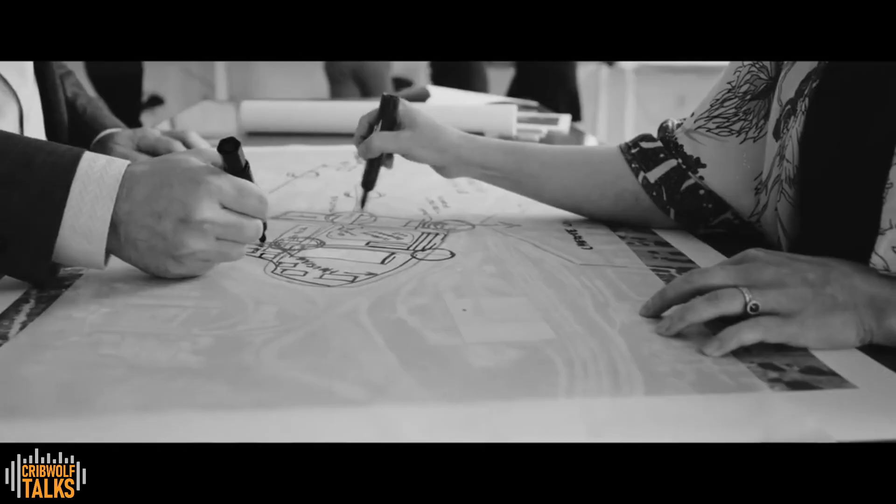Design to me is imagination. The role of an architect is being able to take ideas and concepts and translate them into a three-dimensional reality. In many ways, we're the quarterback of the football team and coordinating the different needs. How can we bring the best intelligence to a project and really make that into something exceptional for our client?

mcCallumSather relocated to the Westinghouse building, and we've often used our own premises as an incubator for ideas. One of the most exciting parts is the ability to bridge between the heritage and the future. Understanding what's there and letting it be what it is, and the new interventions are really creating a contrast that creates a counterpoint by bringing in that modern language.

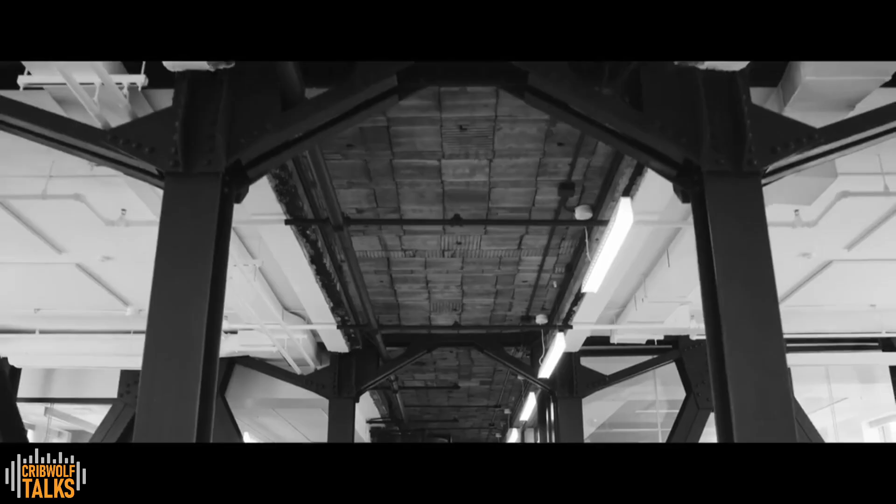Is it a challenge to approach a project with sustainability in mind? Not for us. I think because we have walked the talk for 20 plus years, it's how we think. The future of mcCallumSather is rich and exciting because of the youth and diversity that we have in our company. The fact that we have more than one discipline in-house is a big part of that. Understanding that we're better together and no one person has the ultimate authority to make good design happen.

The city of Hamilton's an exciting place to be because it's a mid-sized city, so the opportunity for impact is actually quite high. And that's what a designer is looking for. You see the reflection of your decisions on the streets. That's what Hamilton gives to any designer. There's never been a greater need for the skills and the intellectual content of what we represent as a firm, which is to the benefit of our clients and to the benefit of the environment. It's just really smart design.

So today my talk will be mainly focusing on how the combination of mass timber and sustainable design elements create opportunities to redefine possibilities for affordable housing, both in terms of building delivery and quality of living for its inhabitants. I imagine for most of you here, the benefit of my talk today will hopefully be getting down to the nuts and bolts of how things get built.

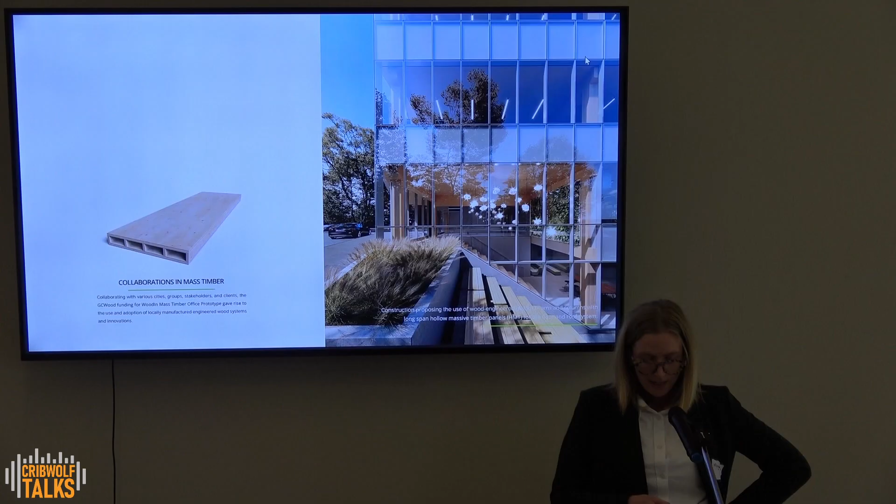So, situated in Waterloo, our community is known for tech startups and innovation. In 2017, our office responded to a government grant, Green Construction Through Wood. We won some grant money, and this research and development led to collaborations with various city stakeholders, clients, industry partners, all people who are really interested in how to get wood into the market. It really gave rise to the use and adoption of locally manufactured engineered wood systems.

You're tall. Sorry. There you go. Thank you. I even wore my tall boots today.

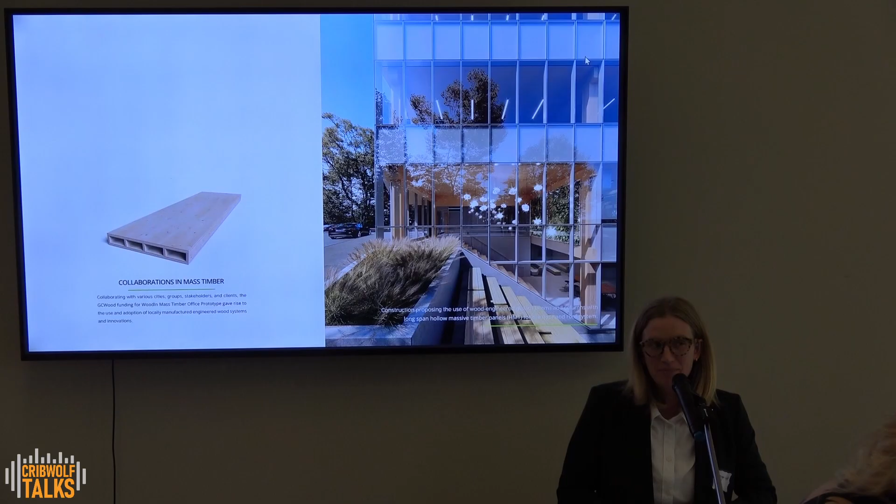So we work closely with our structural engineer and local manufacturer to really optimize architectural elements, to figure out how we could fit them in with the current building code, and then how we could implement them. So for those who don't know, when I refer to mass timber, I'm talking about the larger timber elements. Often it's nominal 2x4 lumber or something like that, and then it gets glued together in the factory. They can then CNC it, prefabricate it, so it gets delivered to site like building blocks, and it can go up incredibly quickly.

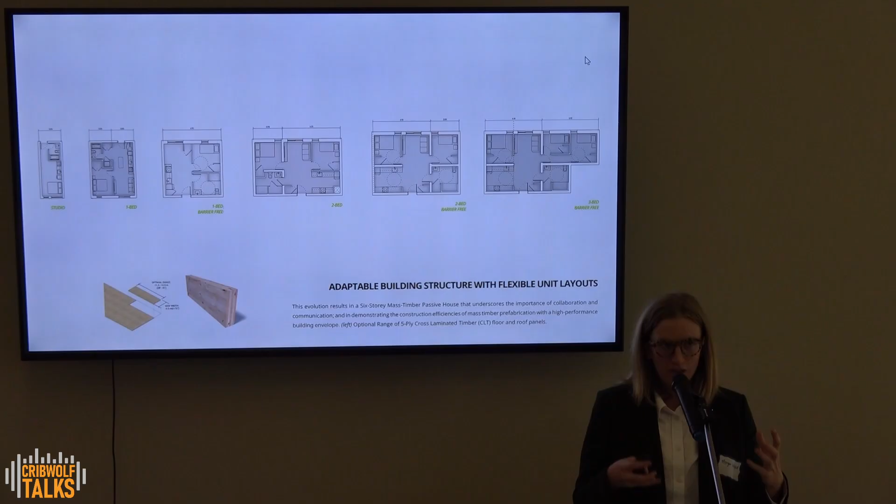So part and parcel to that R&D was finding opportunities to implement these designs. The optional range of CLT floor panels and adaptable floor panels are adaptable in building structure and creating flexible unit layouts. We developed this suite of how we could use those optional systems and create studio, one bedroom barrier free, two bed barrier free, and 3-bedroom barrier free units, so that when we're working with clients, we already have a set kit of parts that we know is going to be able to be deployed on site pretty rapidly. And then working with specific needs of groups, we can customize and cater to each project.

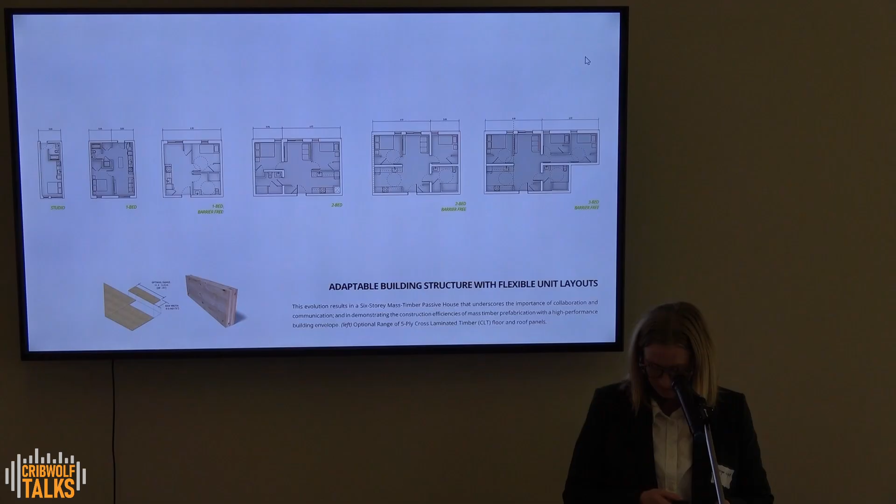So with rapid, affordable housing at the forefront, we have evolved our approach for this mass timber housing. We have tried to incrementally advance each prototype we've worked on, changing just one variable at a time with every iteration and evolving through each build. Leveraging recent success in mass timber projects through speed and scalability, Passive House has become our most recent lever to pull on.

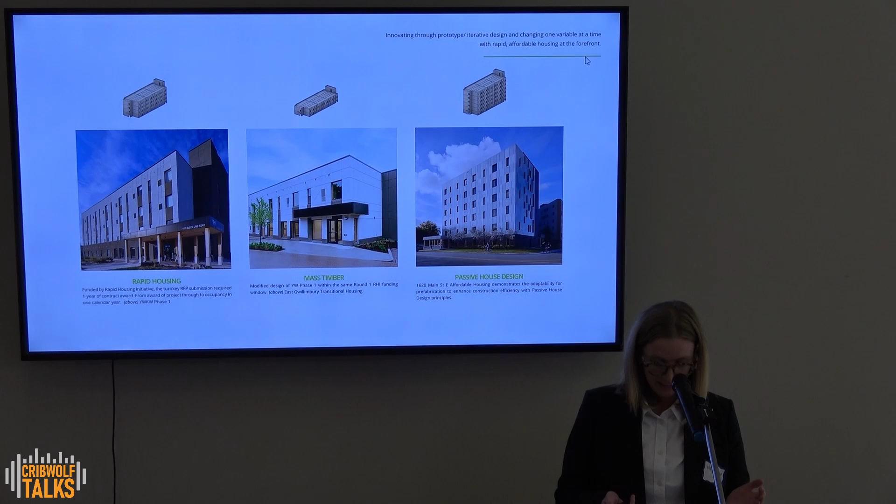So for those who don't know, Passive House is a very rigorous voluntary standard for energy efficiency, and it dramatically reduces your ecological footprint. It results in ultra-low energy buildings that require very little energy for space heating and cooling. And though Passive House is not required for affordable housing, we have found that CMHC does have very high sustainability standards for their funding right now.

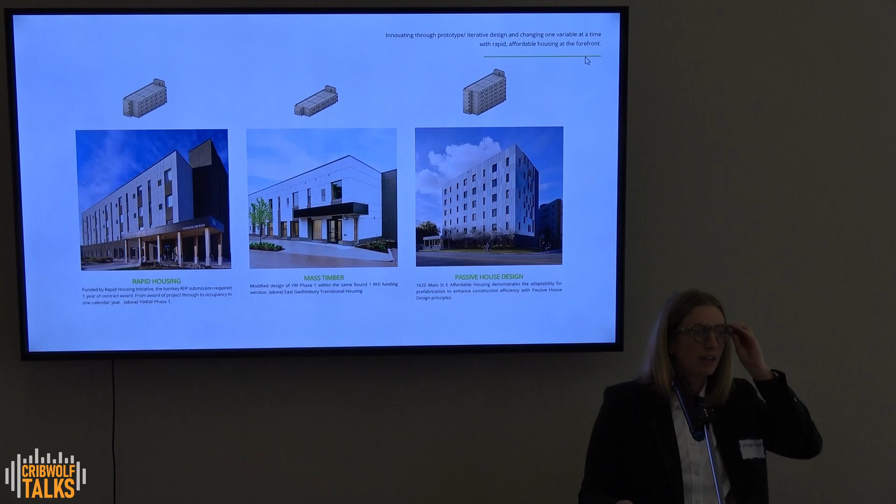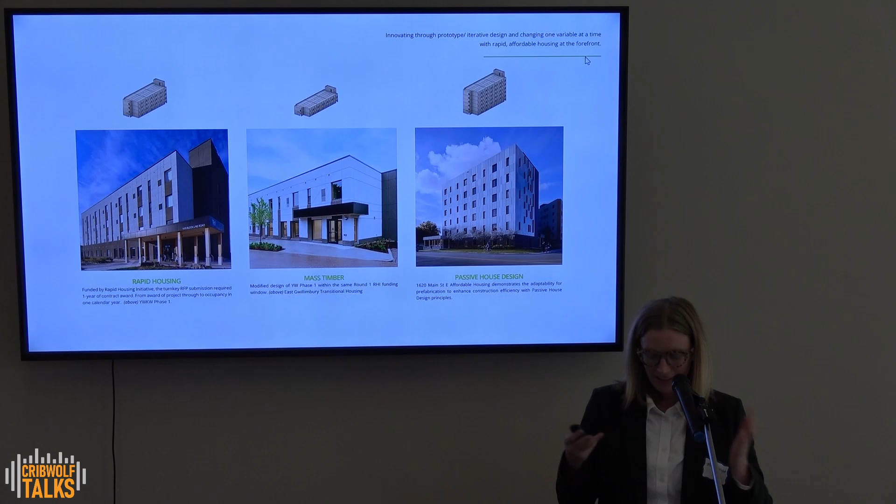So I hope that some of these ideas and principles can still be applicable to anyone starting these projects. I think it's between 25 to 55% better than the National Energy Code, depending on what stream of funding you do. So again, I think all these items are still applicable.

So just some diagrams here. We've again created this uniform grid that adapts to all those unit types I presented. The controlled environment of the offsite mass timber manufacturing minimizes on-site construction and really allows structures to be assembled incredibly quickly. This project here was the YW KW project in Kitchener, and the superstructure was assembled in 20 days, which was really awesome to watch.

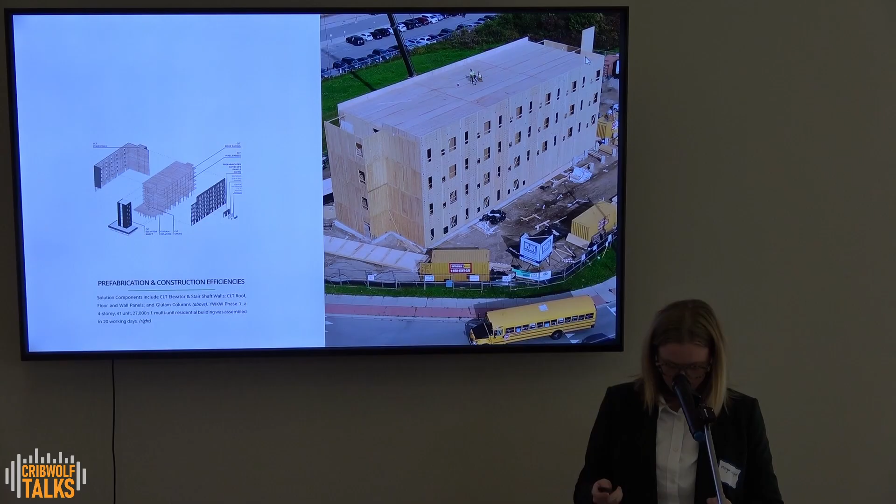There is a video online, so feel free to look it up. It was pretty incredible. Just some images here. I'll be talking a little bit about the project and the mass timber elements and the off-site manufacturing process.

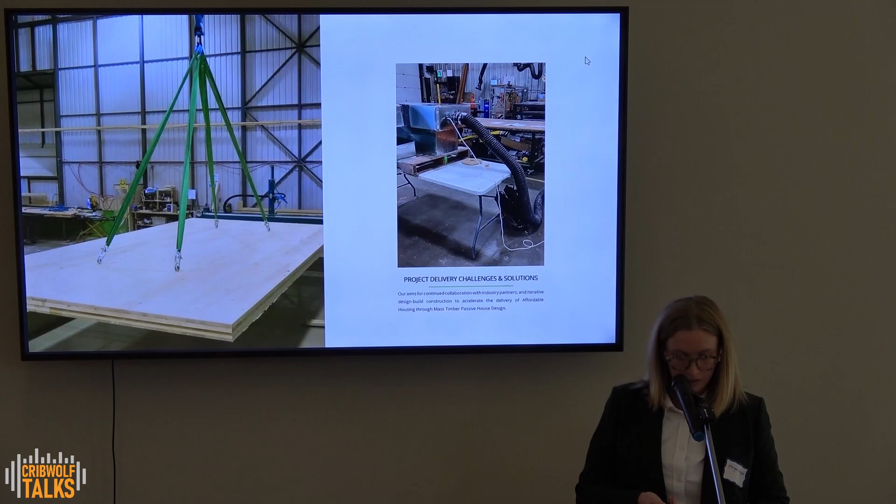So akin to the wood grant we received that I mentioned earlier, initial investment in innovative housing solutions has been funded through the CMHC, providing incentives and an appetite to build mass timber housing. So how did we get here? Early iterations were initiated through the rapid housing initiative funding that CMHC talked about earlier. Quite a few of the projects have gotten money through that stream, and as they mentioned, it's a direct path. It's CMHC giving funding to the municipalities, and then them directly giving it to the organizations that fit the specifications that CMHC outlined.

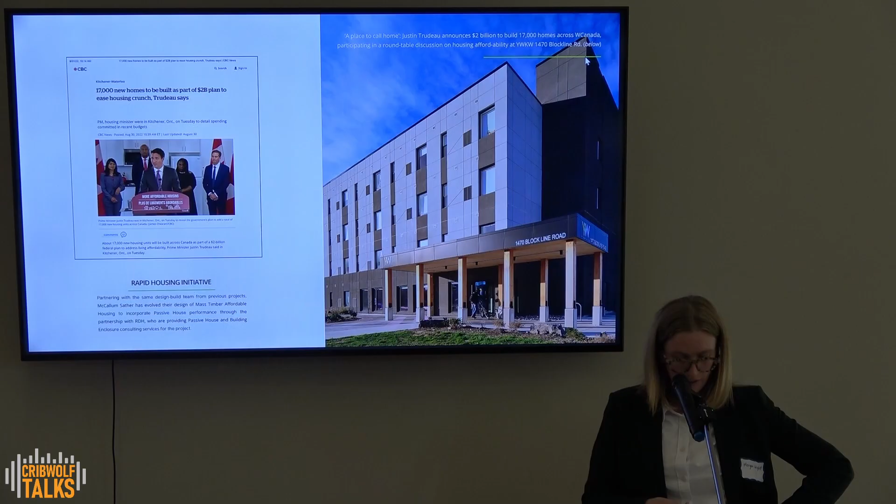So the second round was announced soon after one of our first projects was completed. You can see here this roundtable discussion took place in that YW KW project, which was very exciting for us. The federal government then announced the additional $2 billion to build, I think, 17,000 homes. So that really kickstarted one of our clients, City Housing Hamilton, to pursue innovations in mass timber for the first time. So a little bit about CHH, City Housing Hamilton.

Like many of you, their mission is to create accessible, safe, and inclusive housing solutions. As the largest social housing provider in Hamilton, CHH provides homes that are well-maintained and affordable. Part of their ethos is championing that Passive House design component. I'm not involved in the two projects shown in these images, but I just want to showcase that they have quite a big portfolio of Passive House projects.

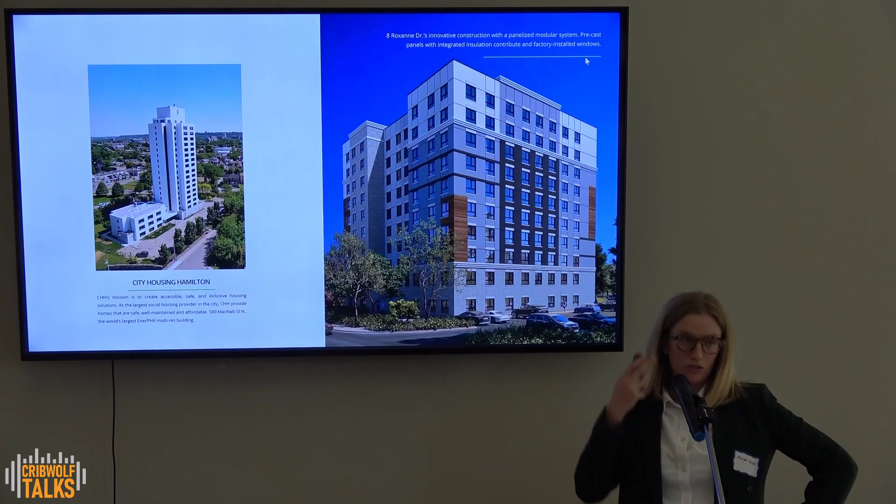The one on this side here was an energy-focused retrofit, an old building where they did a super deep sustainable retrofit. And on the other side is a prefab project that is also going to be Passive House certified. Their journey highlights the critical role of recurring partnerships, and we're thrilled to join partners with them and support their vision. So once built, the 1620 Main Street East project that I'm going to talk a lot about today is in the running to be the first mass timber Passive House multi-residential project in North America. So very exciting.

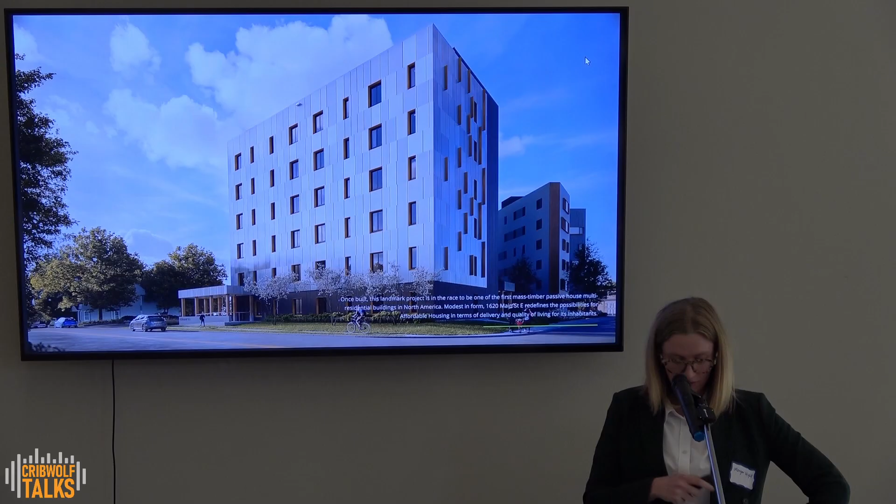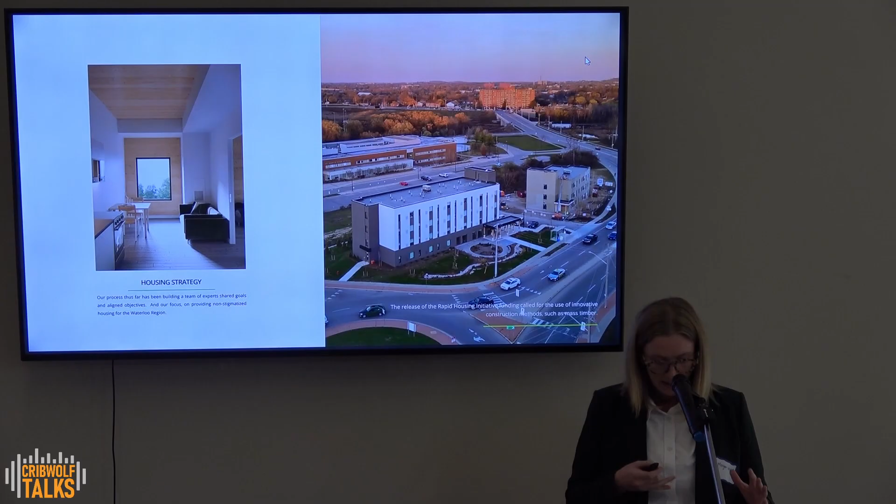So I'll kind of begin with the whole journey on this one. This initiative really began with a few key industry experts who really wanted to focus on destigmatizing housing and wanted to focus on mass timber, and believed that it could be an affordable and an interesting solution for this problem.

The RHI funding allowed us and our mass timber partner to build out this dream team to execute the vision. So we brought in Melloul-Blamey, who's a well-known contractor in the KW region and just generally Ontario, and they're really essential because they provide that backbone. They have a great reputation, they have the trade know-how, they have experience, and they were also really eager to try something new and provide good housing for our community. So they're there in the middle.

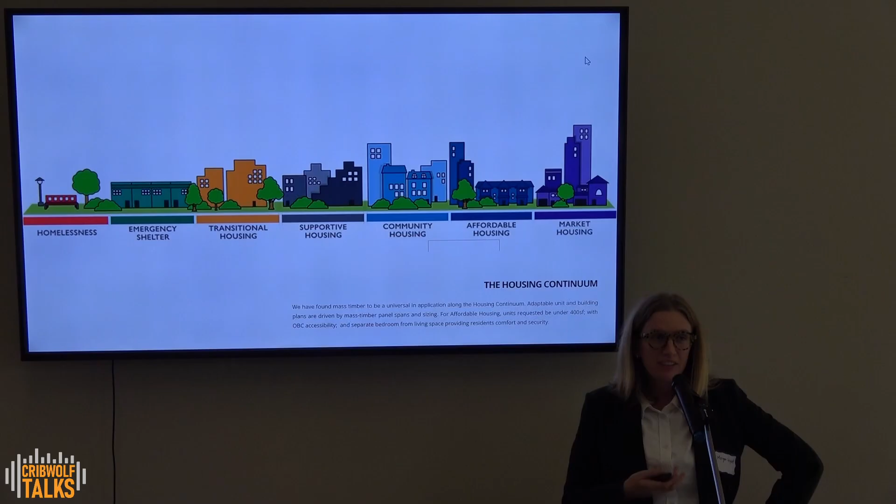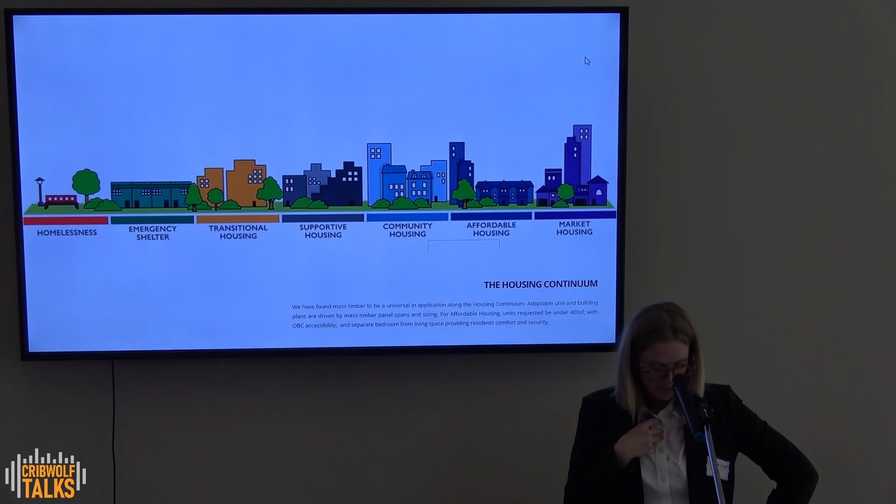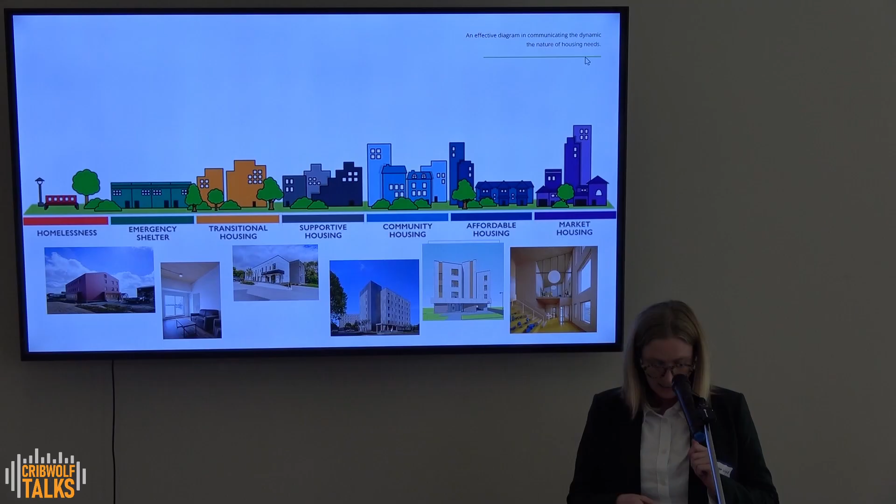So I'm sure you're all familiar with the housing continuum diagram. To me, it effectively illustrates how there's so many different types of housing needed, ranging from emergency shelters to affordable home ownership, and it highlights the importance of coming up with comprehensive solutions. We have been very lucky in our tenure to work with a lot of diverse clients, and it's been a part of our design ethos to create safe, accessible housing, and no matter where it lands on this spectrum, we want everyone to have good housing.

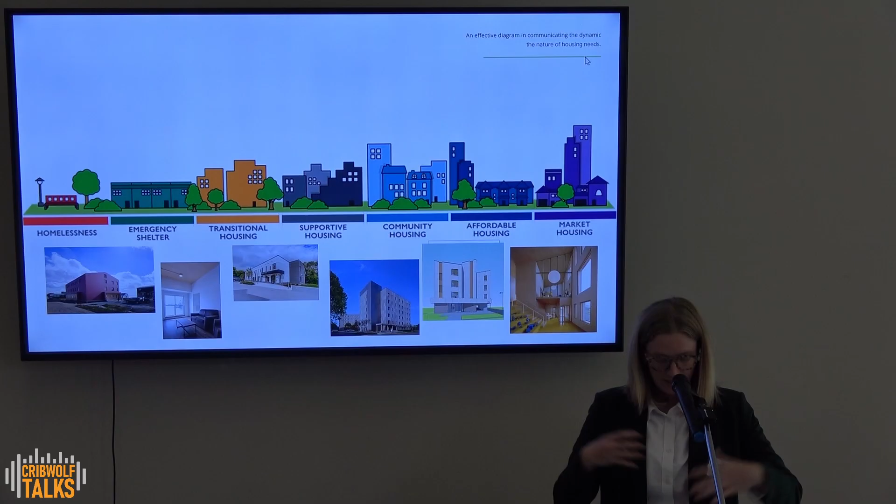So it was important for us to find a way to use that mass timber so it could be deployed across the spectrum no matter where the housing fell. We wanted to use it for everything. We're big mass timber fans. So some differences would be needed to cater to each project, but the underlying principles would remain the same, destigmatizing one type of housing.

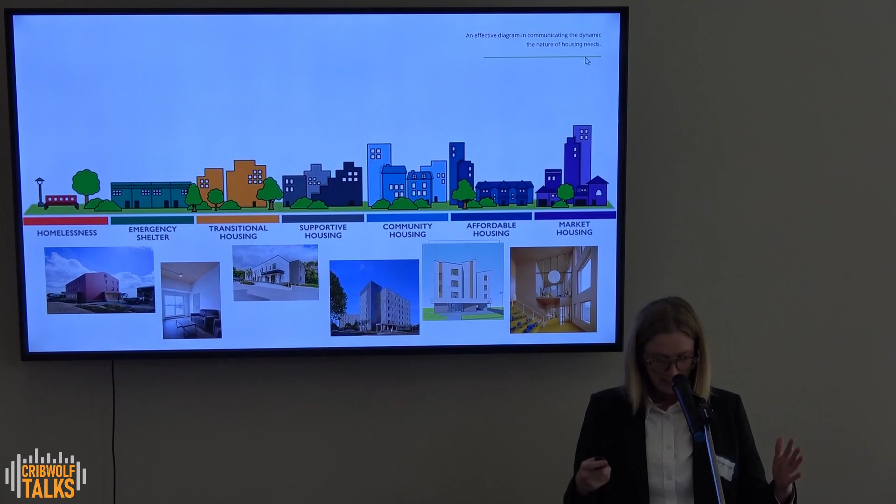So I'm going to talk about a few of the projects we have done, leading up to this 1620 project. So this is 544 Bridgeport, and it's a 5-story, 48-unit affordable housing project. We started in 2019. Actually, it was asked about earlier. We did do, I believe, the co-investment funding for this project with Menno Homes, who now go by a different name. And what was interesting about this model is we did a condo model. They had the capacity to build this larger project, and then a lot of other groups they work with were able to purchase smaller units in this project. So it was a really interesting model, and I think it worked quite well.

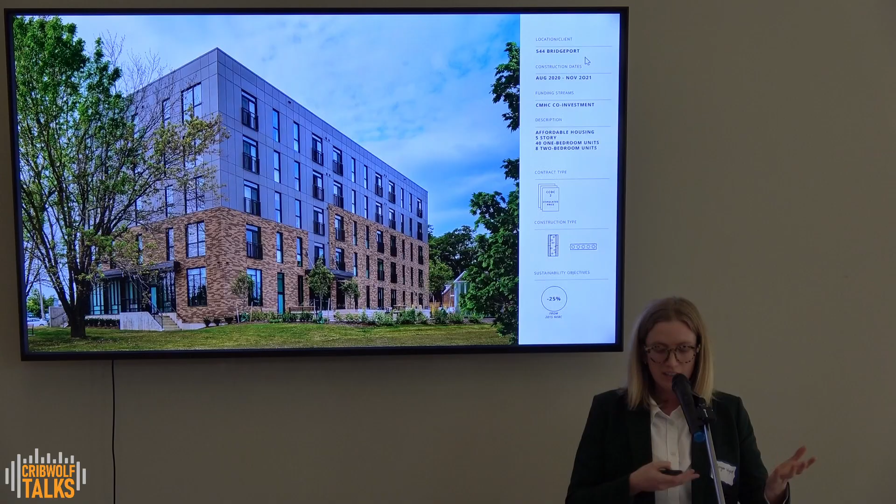Again, it works for the co-investment, but they wanted to do a phase 2 and didn't get the rapid housing initiative just because of some of the nuance and the risks that I think CMHC was talking about earlier.

In fall 2020, the government announced that first round of rapid housing initiative funding. So using the team I mentioned with Melloul-Blamey and Element 5, we were able to execute the construction of a fully mass timber 41-unit transitional housing project for the YWCA here in Kitchener. This design achieved optimal use of city-owned land with a narrow building form. It was quite an awkward lot size. It was a fully electric, net zero ready project. They're ready at any moment when funding is available to start installing solar.

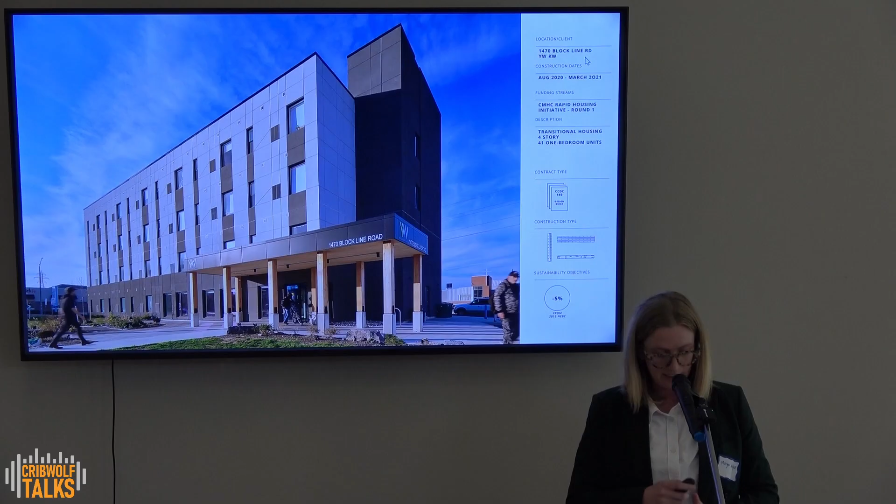We benefited from the use of that mass timber. We used the prefabricated panels to maximize material efficiency and minimize installation time. And the exposed mass timber surfaces inside really create a sense of warmth and well-being. And overall, the project went from contract signing to occupancy in 1 year. So that was crazy.

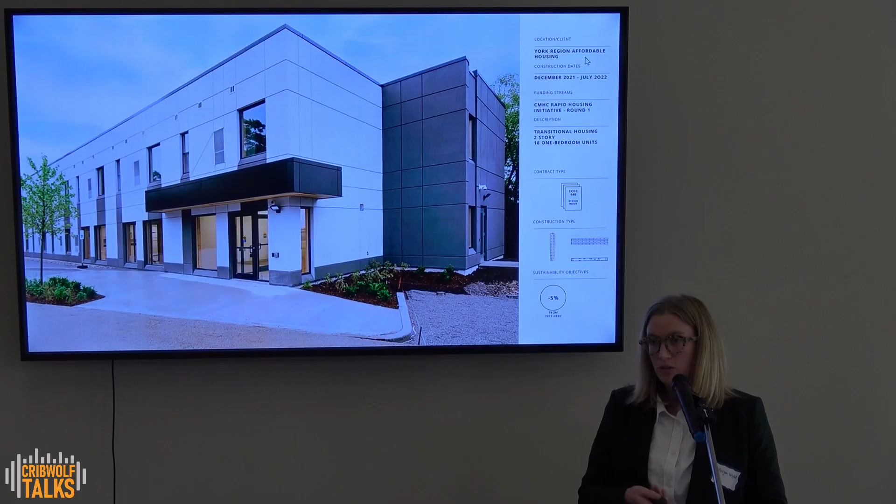So this led to the completion of a very similar project using the same design methodology. This is York Region Affordable Housing, and it was also funded with that RHI round 1. This project demonstrates the adaptability of the approach. We were able to scale it down to be just 2 stories and only, I believe, 18 units. Again, that led us to the perfect position to respond to the City Housing Hamilton RHI round 3 request for proposal. Because of the passive house mandate, it really had us question our method and consider the larger implications of adding that incredible sustainability component into the mix.

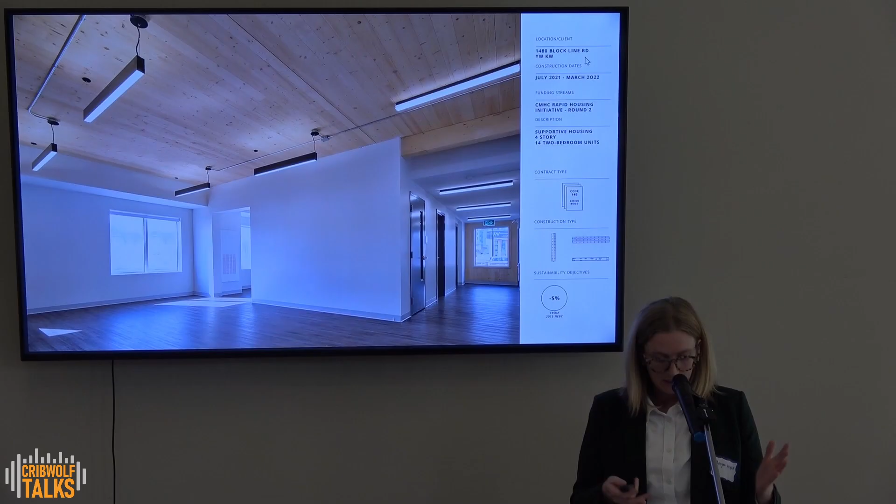Oh, there we go. Okay.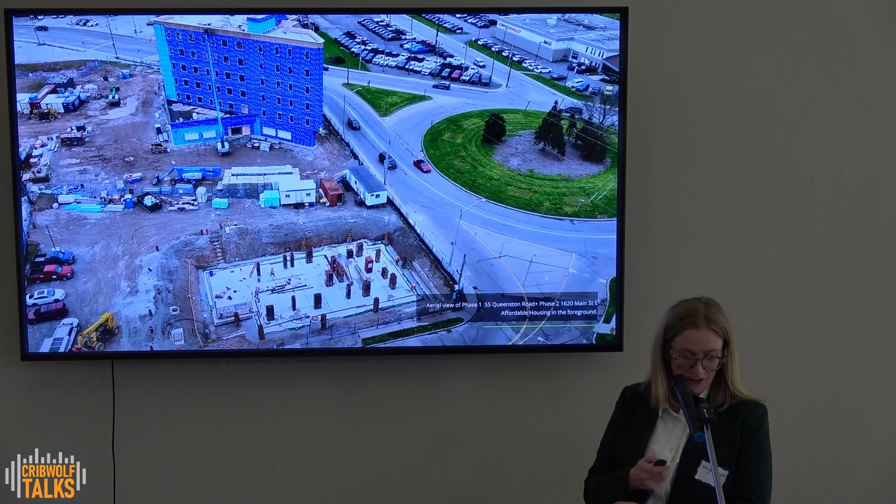Contractually, this is the design build structure. Oh, sorry, this is the site of the 1620 Main project. There we go. Okay, so contractually, this led to our design build structure we've used. It's kind of a simple contract that allows us to capitalize on the design assist and the fast track delivery that some of our trades offer.

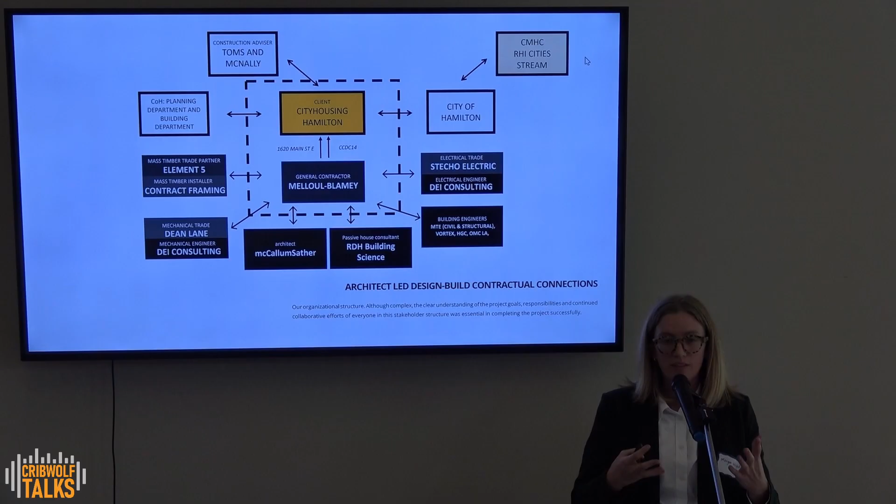So it's really interesting. I think it's really important to have a good relationship with the contractor, the team that they're looking to hire, and just have a really good understanding of the past work they've done. Again, I think doing this collaborative kind of team approach, especially when you're giving a lot of ownership over to the contractor, it's, again, really important to have that trust and that communication.

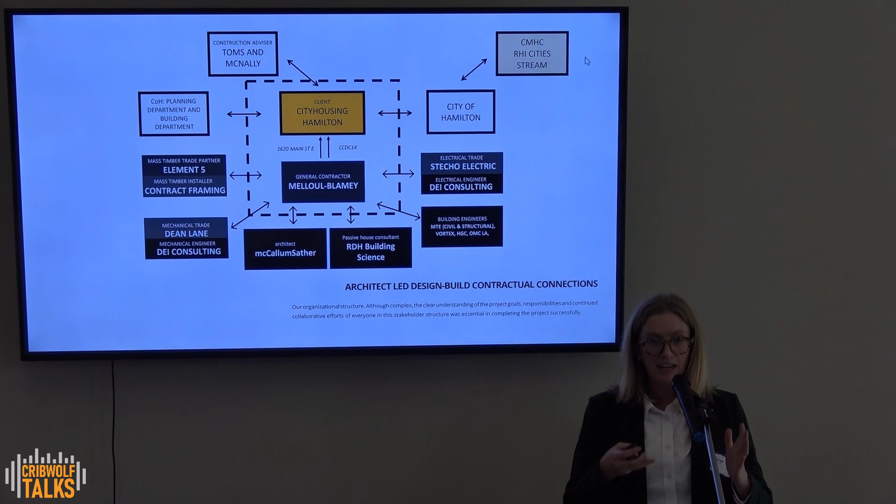We have found that bringing those critical trades into the fold at the beginning is really helpful in creating that shovel-ready project. They're able to provide input, advice for practical application, and those design ideas that get that really good result. So I think I'm just going to go through some of the challenges and solutions. Some of this might be a little bit technical, so please, I hope you're not bored.

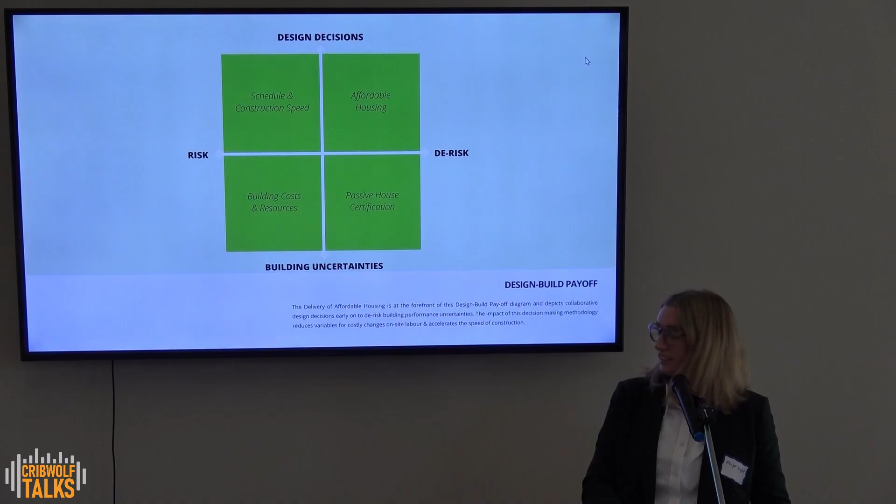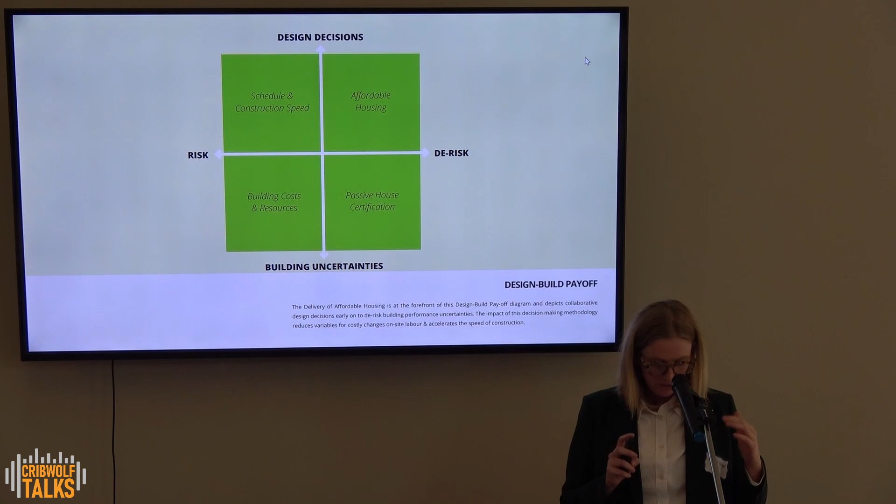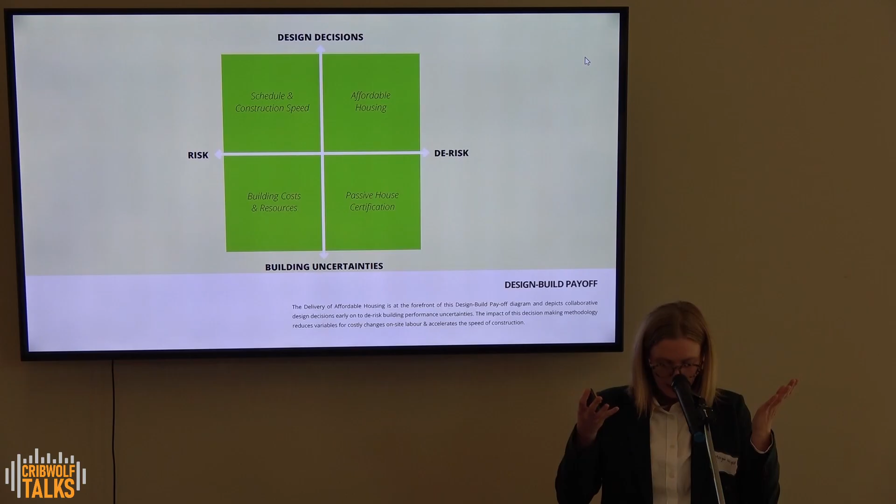So I have here, this is our affordable housing design build payoff diagram that we made. So as you can see, affordable housing is really at the forefront of this diagram. Our approach sought opportunities to de-risk building performance uncertainties early on. Again, with Passive House, that's so critical. It is a certification process, so you don't want to get halfway through the project and not be hitting those certification milestones. So by really upfronting some of those items, you're able to de-risk the process. You do, again, need a team that's really committed early on and can provide that feedback.

I'll show you guys a quick snapshot of our project timeline at a high level. So you can see, again, right from the RFP process, there was a lot of feedback early on from the stakeholders. And once that information was all gathered, the project was tendered and a fixed price contract was created. So again, it's really putting the contractor in the hot seat, and they're really relying on those trades, the consultants, to give them really good information to build that fixed price contract.

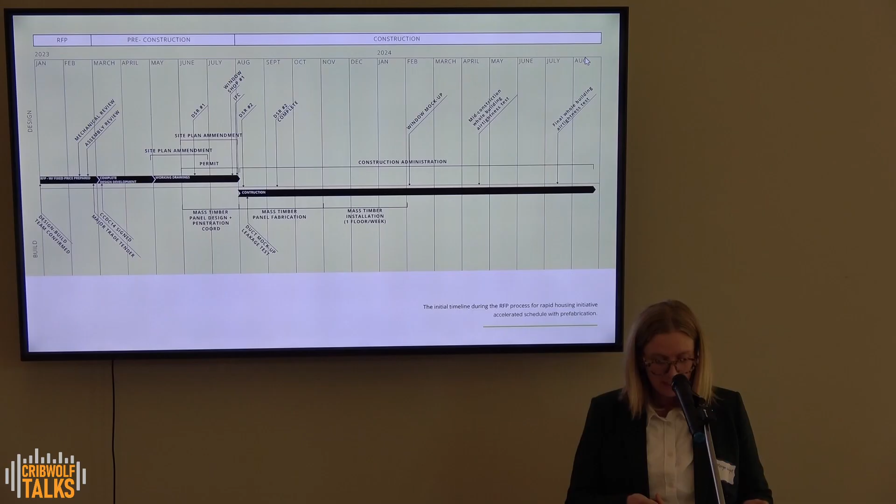By taking advantage, again, of some of the design assist offered, we're able to start working on things right away, prefabricated elements, ordering large components that have long lead times, so that it just gets everyone moving and everyone committed to the project.

So one big thing we attribute a lot of our success to is we do have these bi-weekly team meetings, and I know that doesn't sound that exciting or that innovative, but we do find that it really creates a great platform for the team. In the beginning, the architecture team hosts this during design, and then responsibilities shift to the contractor during that second half. It sets the pace for the project, keeps everyone on that accelerated timeline and maintains that quality assurance from the client side and the contractor's side.

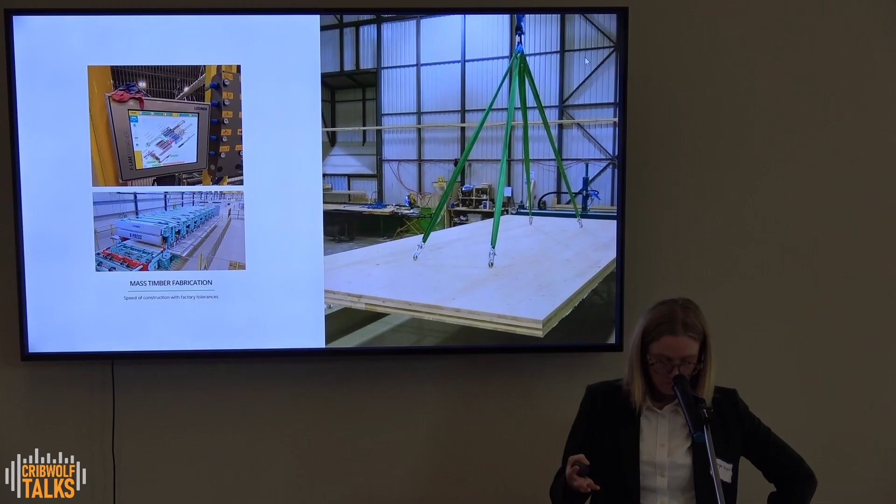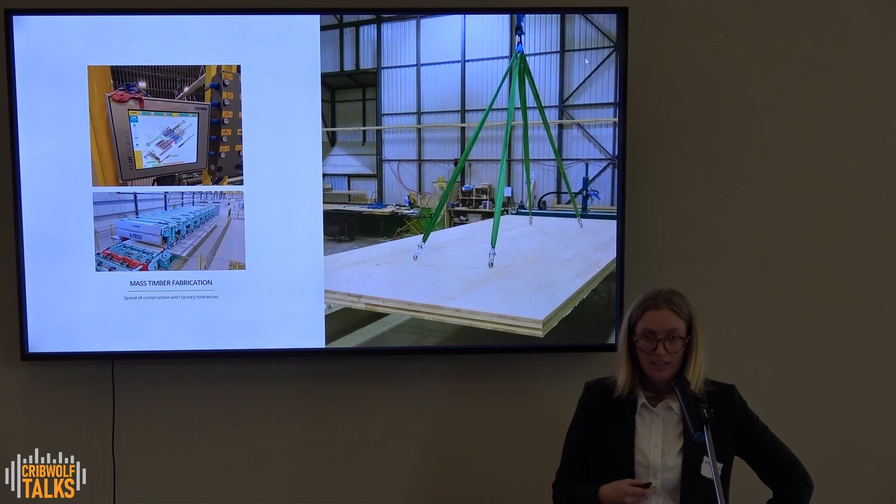So I mentioned we're using the mass timber supplier in a design assist role, which can give the team the ability to create the fabrication and the engineering drawings at the same time. So panel fabrication is able to start as soon as we receive a building permit. It's beneficial to have that happen while site work is ongoing, because it means less time in construction. For this project, it also meant less carbon emissions with transit, because the plant that Element5 owns is in St. Thomas, only 2 hours from site, a lot less traveled material.

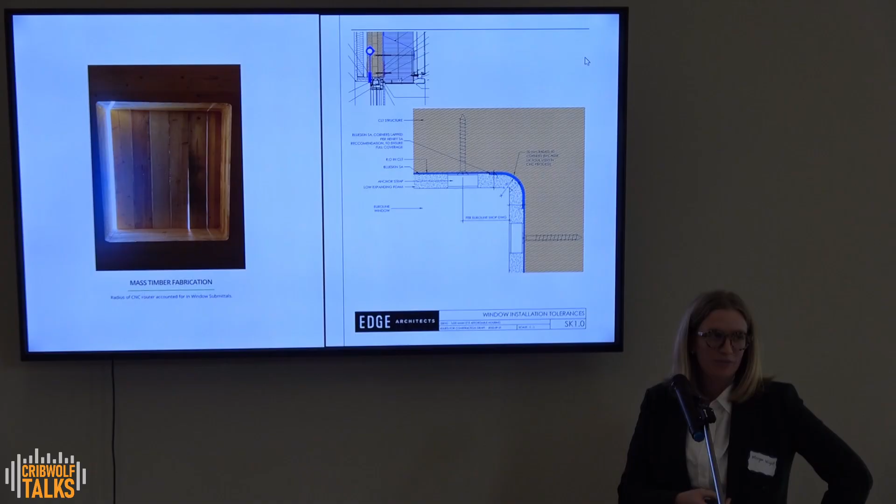Also, kind of nerdy, but it creates incredible precision for us as architects. It's really interesting to work directly with the engineers and be able to create the tightest building enclosure we can, which adds to that sustainability factor, the airtightness of the project, less heating, less cooling. Really, really exciting stuff.

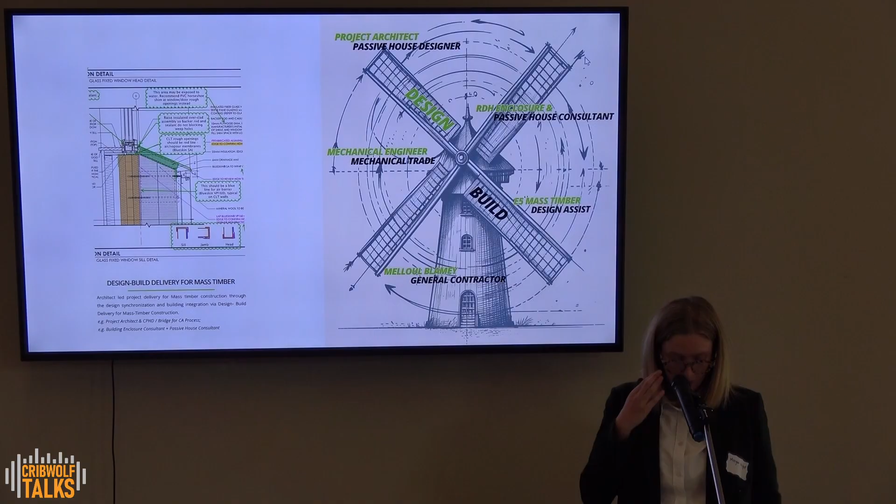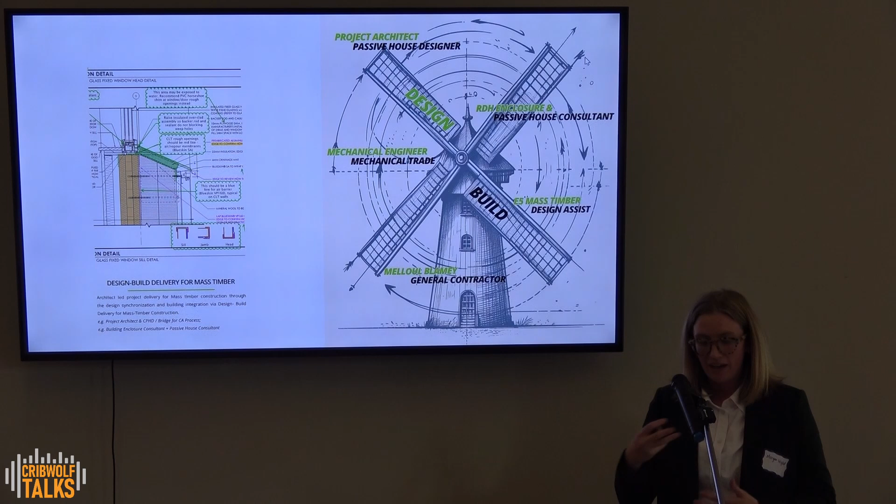So earlier slides, I discussed that kind of contractual type. In reality, that integrated collaboration kind of looks more like a flywheel. There's this constant kind of loop of design and construction, going back and forth between the two. These feedback loops really connect the contractor to the architects and the consultants, but also between the trades and the engineers. On this project specifically, again, that high performance aspect, every trade was almost linked up with a consultant, and again, there was just this constant back and forth, open dialogue, which is really important.

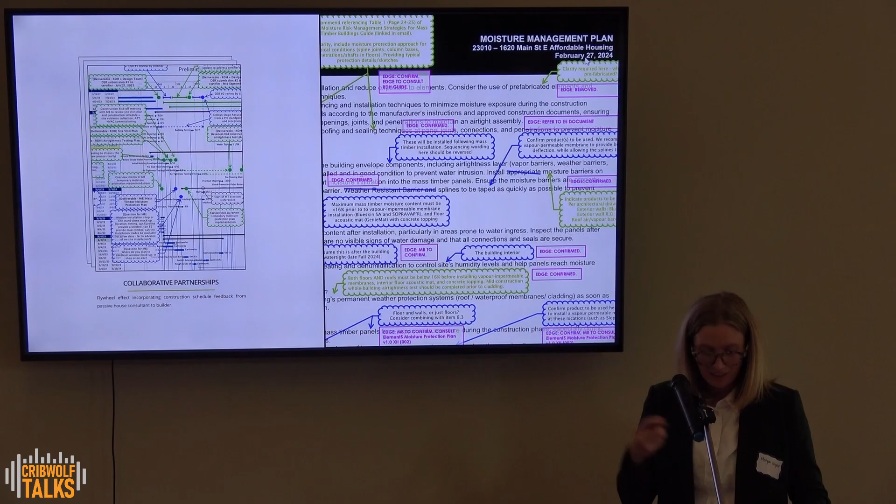Again, just some information about the collaborative partnerships. There was, again, this great open dialogue between everyone, a lot of back and forth, a lot of vetting and reviewing prior to construction actually starting, a lot of reviewing schedules and agreeing on targets and milestones. And doing that really early on set the tone, set the pace, so that when construction started, people were really, really on the same page.

And again, we made decisions really early. Once the contract was signed, I should say, we had already ordered some of our large mechanical systems, we ordered our shower bases. Again, just making sure everyone was really committed to what we had already decided. There was no waffling or changing. It was like, these are the shower units we're using. We're all committed.

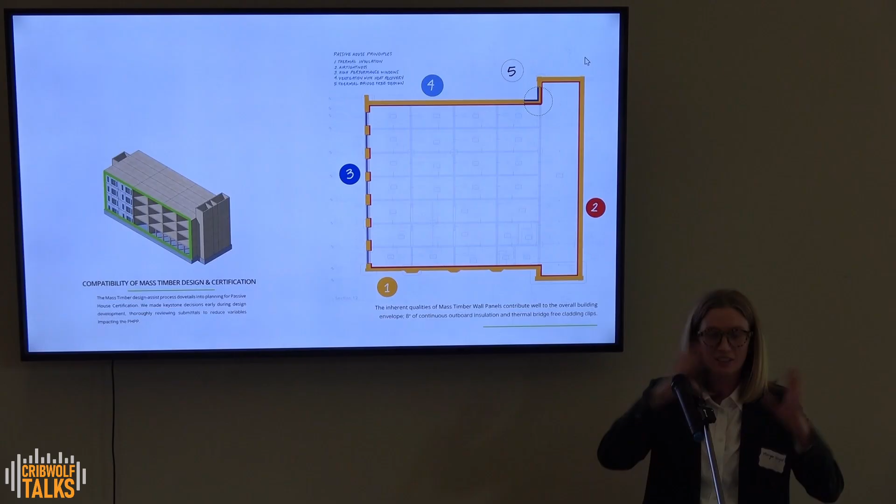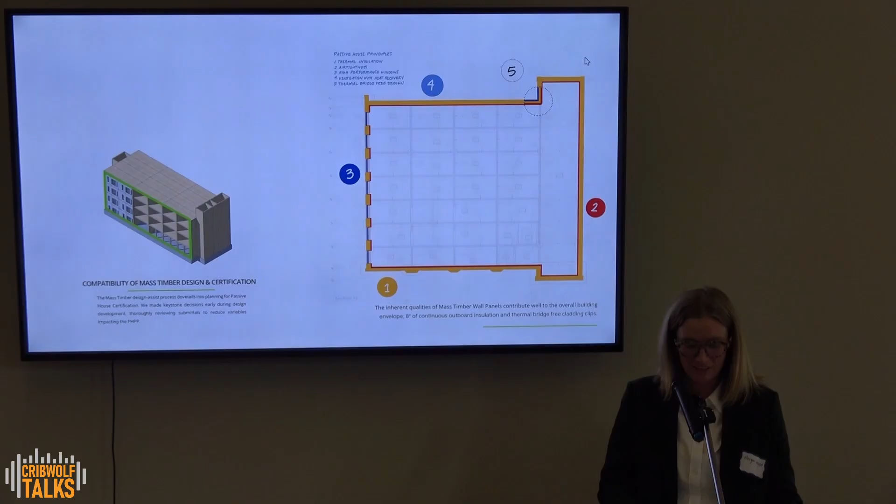Delivery and best practices. So this, again, is a little bit more on building science that I hope could be applied. You just want to focus on making sure that you have a great building envelope. Mass timber is an excellent substrate for that because it just provides a constant thermal break. You're able to coat your building in insulation and have that continuously insulated project, which is the ideal scenario.

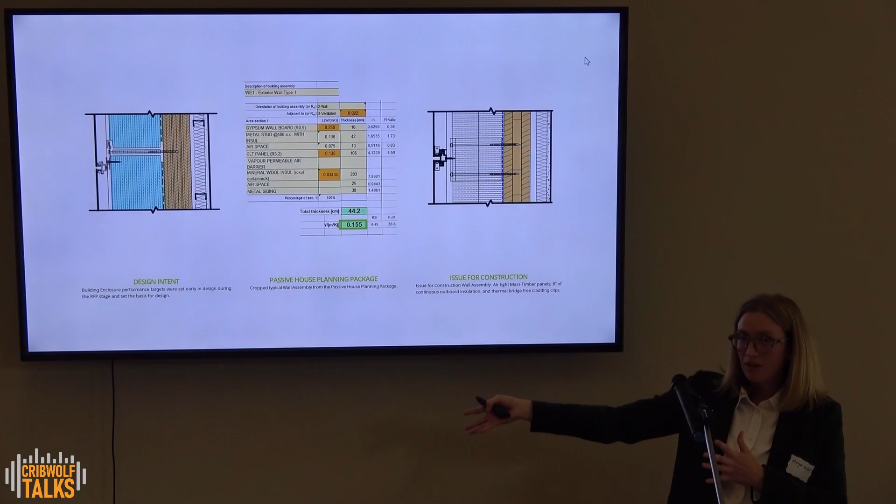Just a little bit about design intent to construction. Again, with making decisions early, we really had to make these decisions at the RFP process, and then we had to track them through. We basically have the same building components that we initially set out to have. Just some exciting 3D modeling, to show that we've got a great building envelope on this project. But I think just focusing on triple pane windows, that's such an easy one. I know a lot of you are doing retrofit upgrades. Some of these small things are a little bit more expensive, but they really do increase your building efficiency.

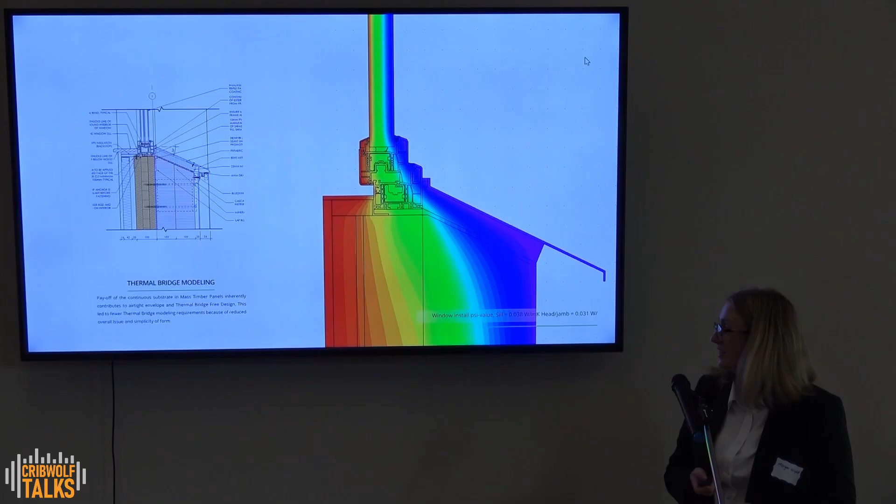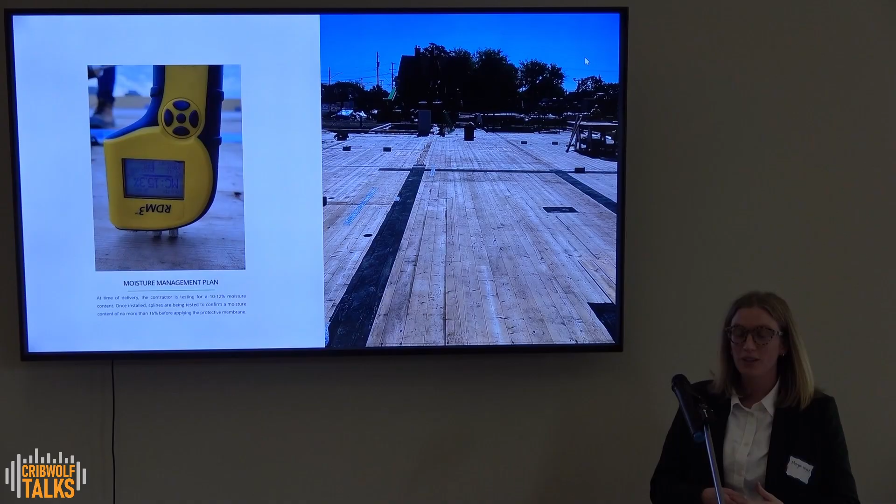Mass timber is a little tricky. It doesn't like to get wet, so it has been important for us, and the whole team, to have that feedback loop of making sure we're monitoring what's getting built and how we're getting it enclosed in a timely manner, because again, there are thresholds for mass timber. It does have to get properly closed in without being wet.

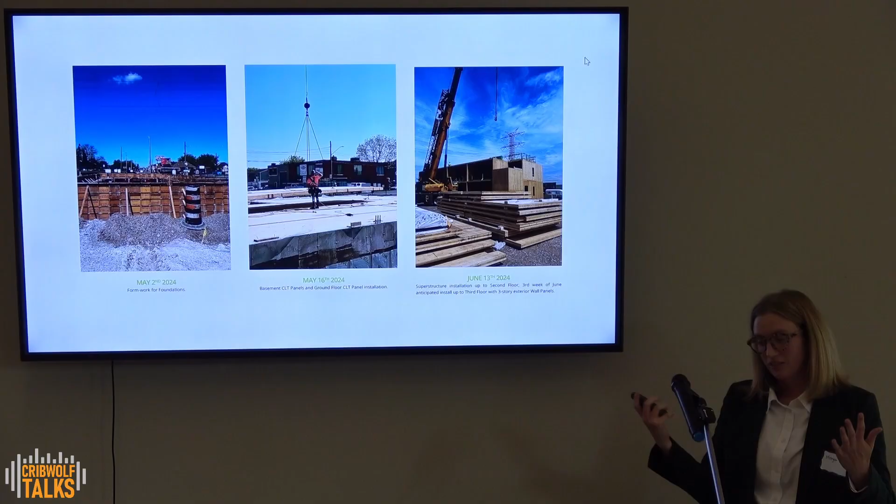Just again about that fast track nature, some pictures from site. You can see May 2nd, we essentially were in the ground doing our basement. Then May 16th, a couple weeks later, we were already starting to install our floor slabs. And then you can see in June, we're already going up. Today, the building's fully enclosed, which is really exciting. We're starting to do all our insulation. The windows are all in. It's very exciting and has gone incredibly quickly. And that's just where we're at now.

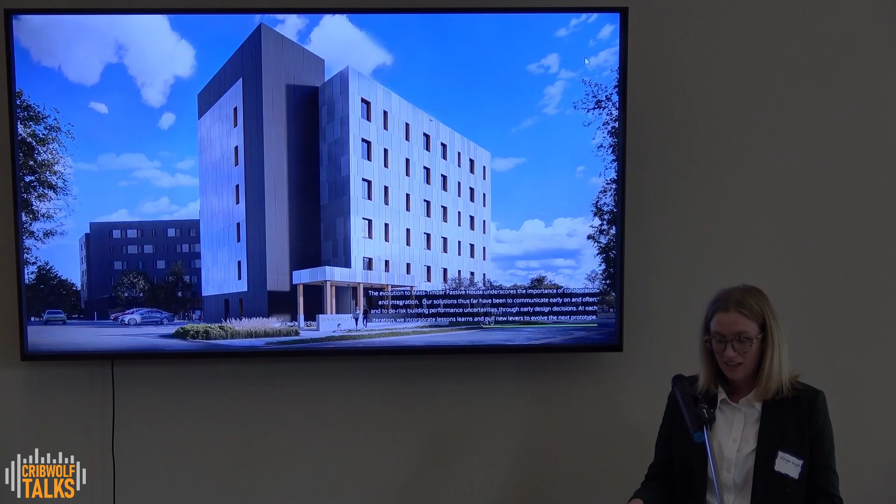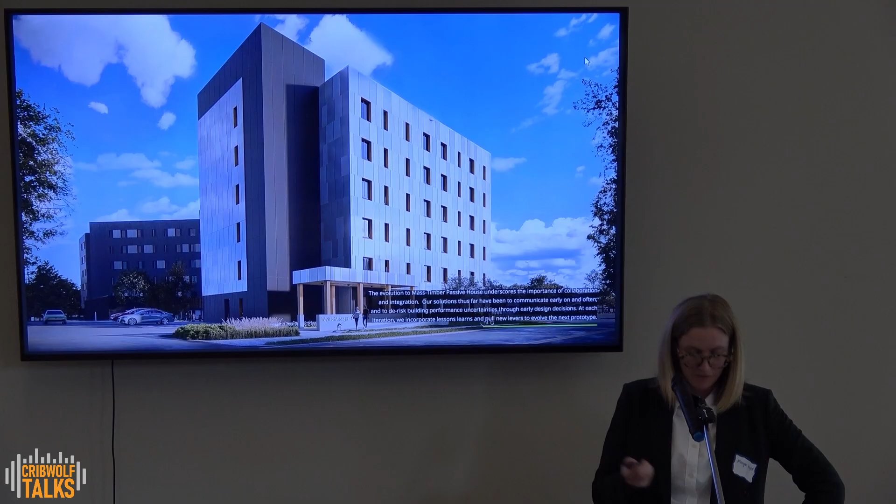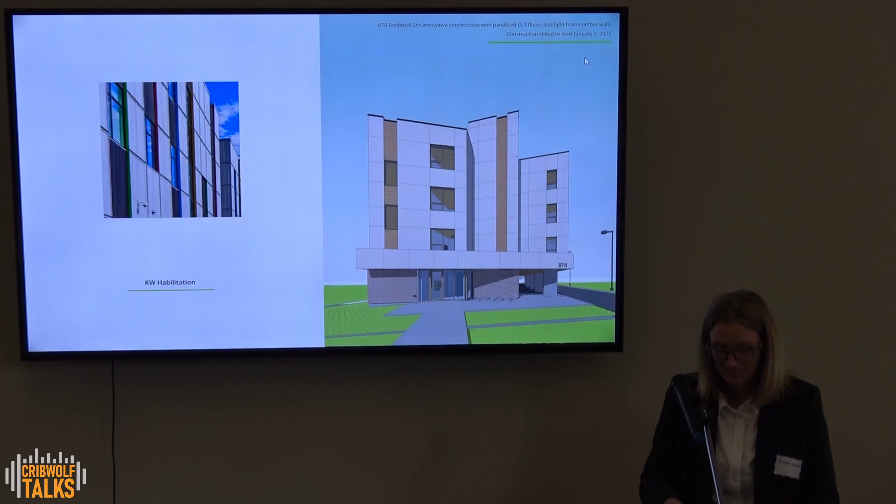That concludes today's fascinating discussion with Morgan Wright, Associate at mcCallumSather. Morgan's work at the intersection of sustainability and innovation in architecture is truly inspiring, especially her expertise in mass timber construction, which is reshaping the future of sustainable building practices. From her award-winning projects to her hands-on approach to designing spaces that positively impact communities, it's clear that Morgan's contributions are not just architectural, but visionary.